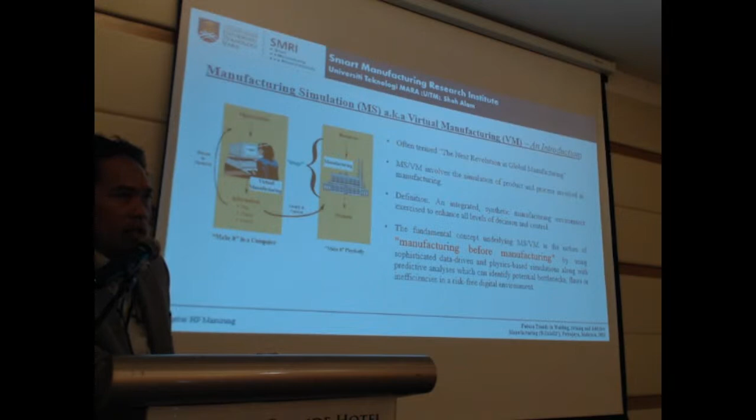So manufacturing simulations - if you go to Europe, Switzerland, or German-speaking countries, sometimes they refer to this as virtual manufacturing. There are a lot of definitions on that. Since many years, this term is seen as the next revolution in global manufacturing, and there are many definitions of virtual manufacturing or manufacturing simulations. I don't want to go through them part by part, but the most important thing is that virtual manufacturing's fundamental concept is the notion of manufacturing before manufacturing, using physics-based and data-driven approaches from experiments and so on.

Some things we have to know before we go deeper into manufacturing simulations: simulations will never replace the experiment, but they can minimize the number of experiments, hence reducing the cost. Simulation results are never 100% correct, because the input data is approximated, the mathematical and geometrical model is idealized, and the accuracy is also limited by the computer. We had a problem last week where some software couldn't be installed or run on a certain computer, meaning it also depends on the computer.

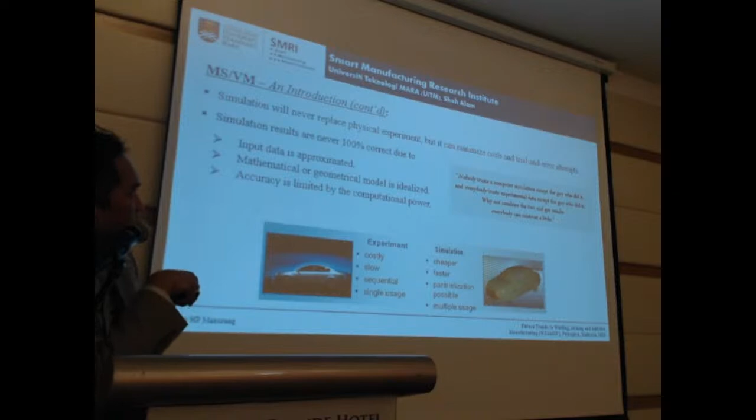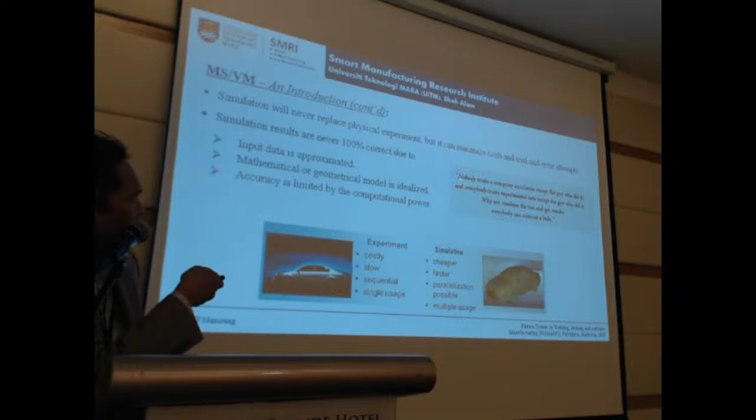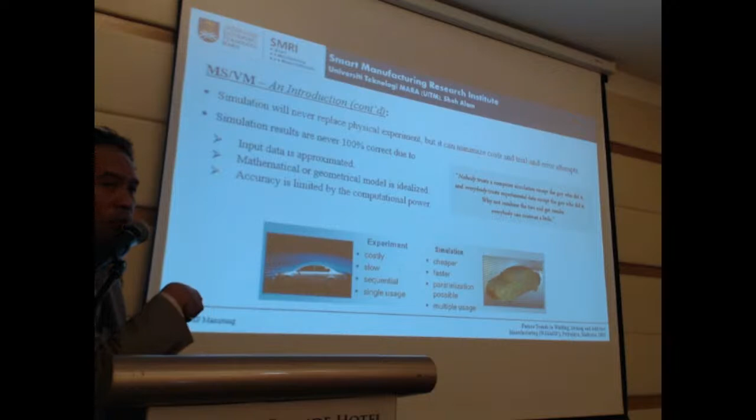We can compare these and see why simulations can give some advantages. For example, they are cheaper, faster, parallelization is possible, and there's also multiple uses. If you compare with experiments, those are costly, slow, sequential, and sometimes can only be used once.

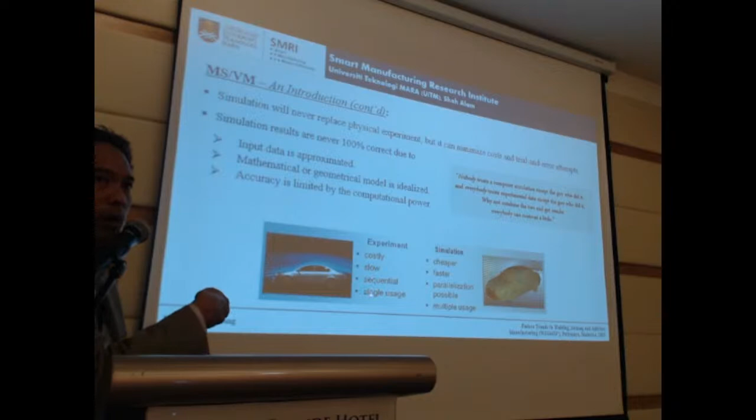So the challenge is that there are conflicting objectives in manufacturing simulations. We would like to have fast calculation, and we would like to have process chains - for example, if you do a coupling process, you would also like to do coupled simulations for that. We would like to have real physics, so that it represents all the experimental activities or cases, and we would also like to have simplifications. So this is like the conflicting objective when using manufacturing simulations.

So how do we resolve this? We need interdisciplinary sciences, maybe between members within the groups - not always other faculties. So the members in the group can specialize in various interdisciplinary sciences.

The application of simulations is often only for a single process, but the direction is toward chain processes. Currently, how can we simulate the process after one process? For example, if you are doing forming and welding, or warm forming, you need simulations that couple the processes - meaning all the data from the previous process has to be transferred. It cannot be just a single process.

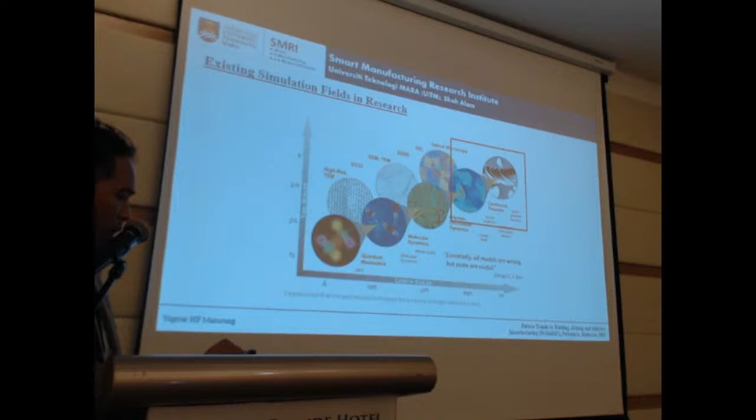With regard to manufacturing, we can divide into two: applied and fundamental. If you see here, the continuum finite element, we can have some methods here, for example thermal, mechanical, thermomechanical. This is considered as the applied.

Applied research, and here is for the fundamental. So we are doing this kind of discrete dislocation dynamics, by having crystal plasticity finite element and also cellular automata, phase field. This one is more to the fundamental.

In between applied and fundamental, we can do this kind of thermomechanical metallurgical and also thermomechanical fluid. There's combinations between CFD and also continuum mechanics, solid mechanics.

So here the objective, what we can do, for example, only the temperature, distortions, and so on and so forth, up to the grain structure and texture.

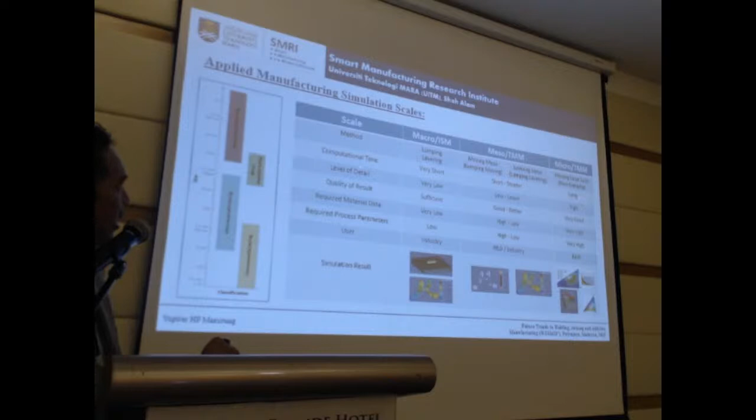If you see also here, the computational time is very short, and the industry would love to have this kind of simulation method. And here, a little bit short. And here is very long. Level of detail also, you can see, very low, low, and high. And the quality of result: sufficient, good, and very good.

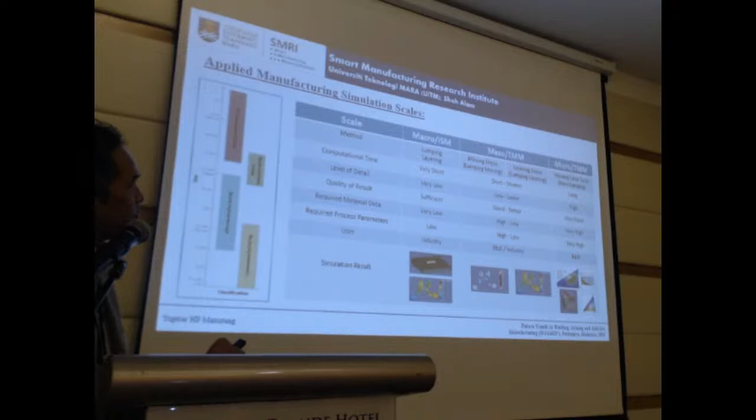If you see here, lumping is one of the methods which we are also investigating until now. What is that actually? So if you see here, we differentiate between non-lumping. This one is very slow, right? It means that if you have big components and you have to do that kind of simulation, it will take a lot of time.

So what we can do is actually lumping here. Lumping meaning that in lumping moving, some elements are combined together, so that it is a little bit faster than this non-lumping one. And then here is lumping layering. Some software is using this lumping layering, for example SLM, so it will use the equivalent heat source equations here. So it means layer by layer, the whole layer will be simulated, will be lumped, we call it.

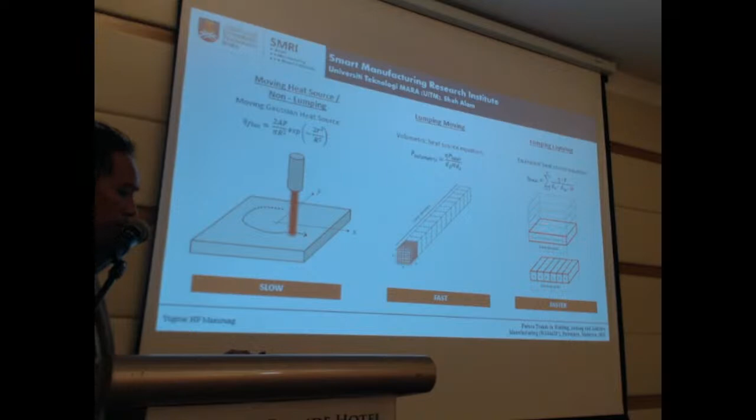So challenges in the macro and in the meso. For macro, or inherent strain method, the Japanese professors or researchers would love to do the ISM a lot. I saw a lot of journals, they are using the macro. But in macro, you need equations which you trust that it is correct, or you need the calibrations for that.

So for the meso, or TMM, thermomechanical method, you need also to know that the temperature is correct, so that you have to do the calibrations for the temperature. So both, you have to consider.

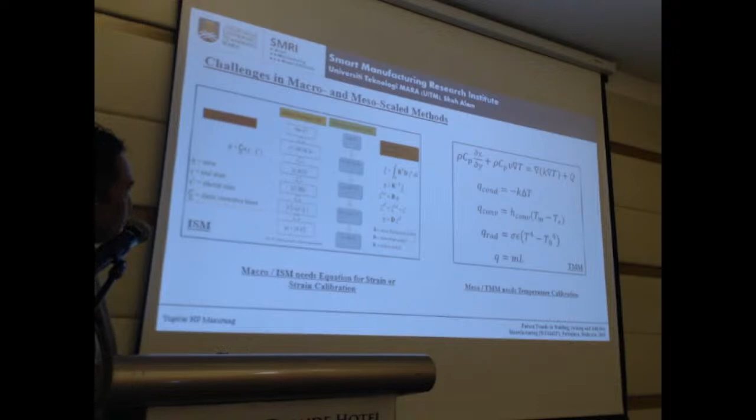This is also something new in the simulations world, especially for manufacturing. A lot of forming processes are coupling with this, meaning meso and micro scale, also with defects, for example to find damage, strain, stress, and so on.

All right, I'll go faster here. Some case study: at Volkswagen, this one is from 2019. This is Mr. Ralf Sundermeyer, director of CAE. What he said is about 2025, that one was 2019, short before COVID, so I think that will be extended.

So by 2025, he said that at Wolfsburg, Volkswagen, each engineer shall be a CAE expert. You can imagine the employees maybe 40,000, engineers maybe 2,000 to 5,000. On any computer they have to have this CAE. This is their dream, that every engineer must be capable of doing this kind of CAE.

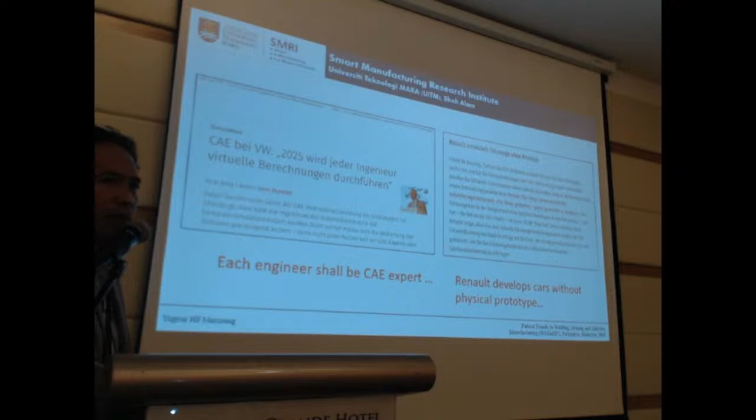Also, Renault, for the Clio, a small car, developed the car without a physical prototype. So they trust the simulations, or the trust of the simulation is there, without any physical prototype, only the simulation.

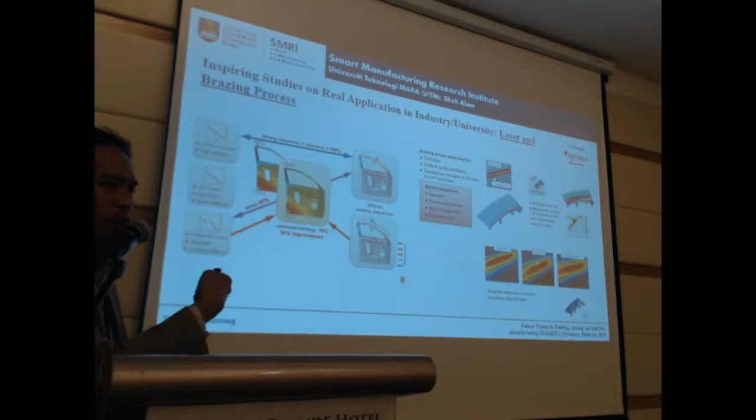Here at Audi, I'm also dreaming until now that I can get a call from Proton or Perodua, saying 'Peter, can you do that kind of investigation on the welding sequence, for example?' So this is for Audi. What they are doing is defining which welding sequence is appropriate for the door. Normally they do 80 experiments, but with the help of simulations, they do only 5 experiments, trying different sequences to find the best sequence for laser welding of the door.

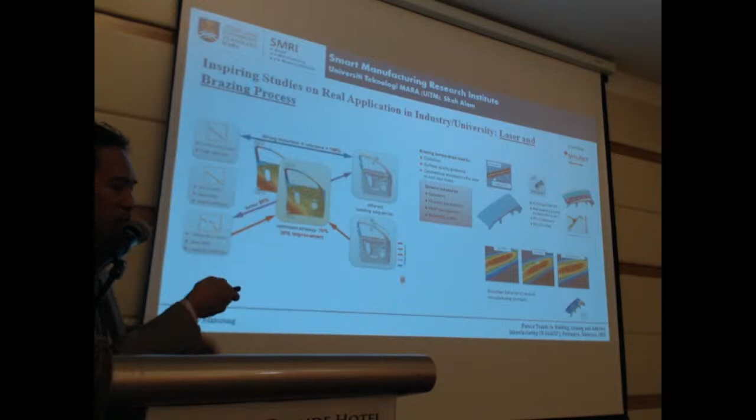This is for laser brazing, also I think by Volkswagen. They simulate without holes, with holes, and the holes after the brazing, meaning brazing first and then the holes. Then they would like to see the distortion. So that kind of project is quite interesting, also done by automotive industry in Germany.

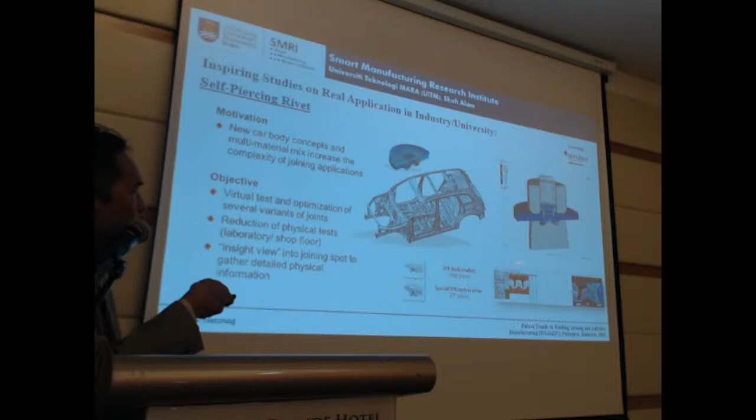They are investigating the self-piercing rivet, also using simulations. You see here, the normal SPR needs 2085 pieces. With this new idea, they reduce it to only 277 pieces. So you see the impact of that kind of research.

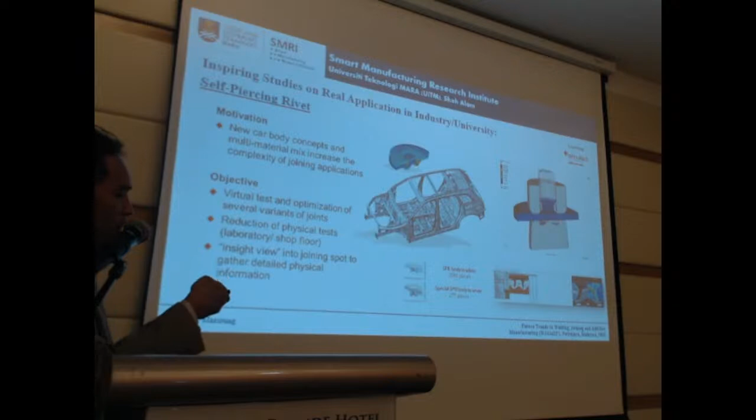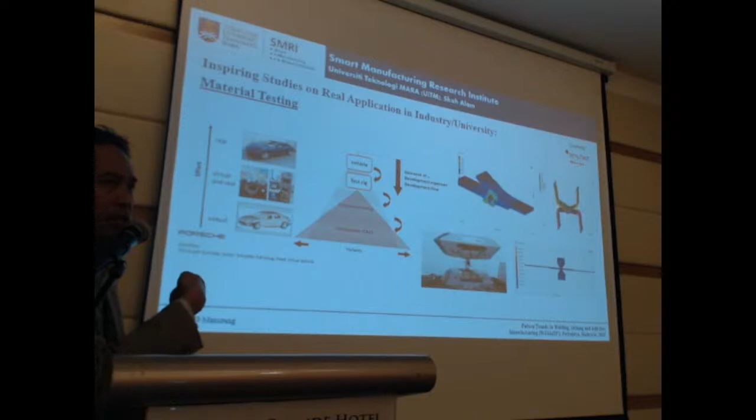Testing at Porsche, yeah, they are using simulations for material testing. What they said is that you see here the decrease of development expenses and also development time. So they are also moving towards virtual testing.

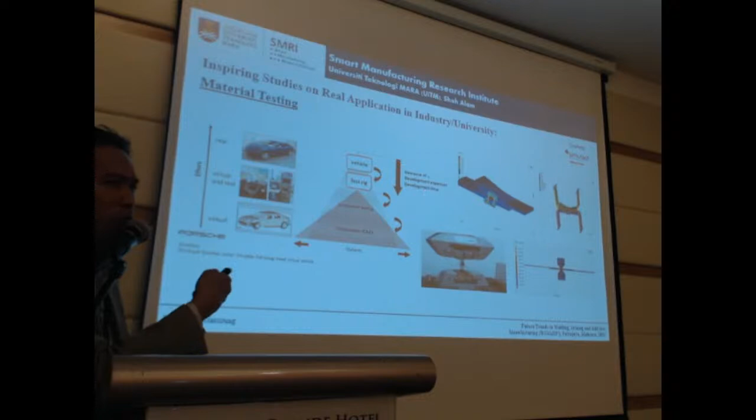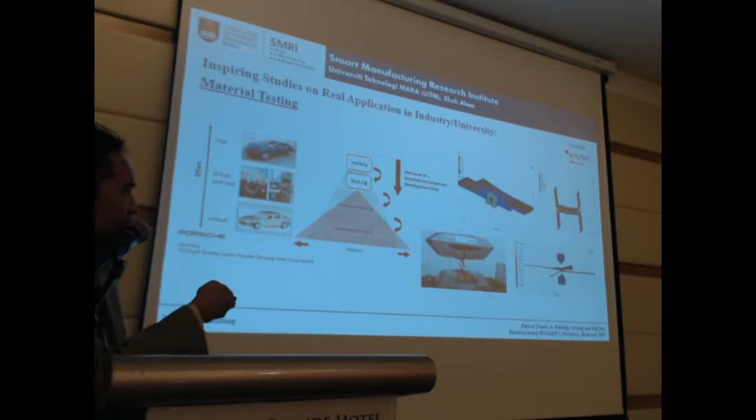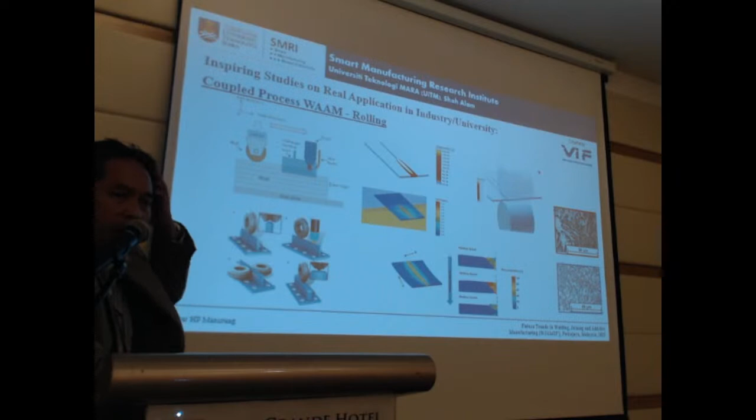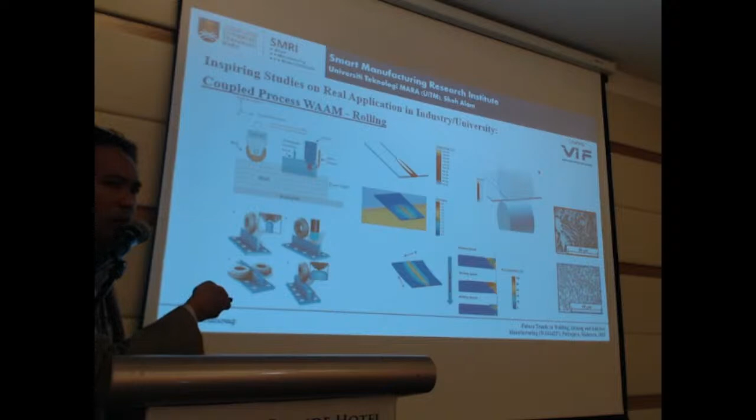But what is interesting here, this one is with our partners also from a German university. They would like to weld and then roll. By using these simulations, they can define after how many seconds they have to roll the plate after welding, so that they have full recrystallization. They found out it's about 4 or 5 seconds after welding that they have to start rolling. So that kind of thing they can simulate.

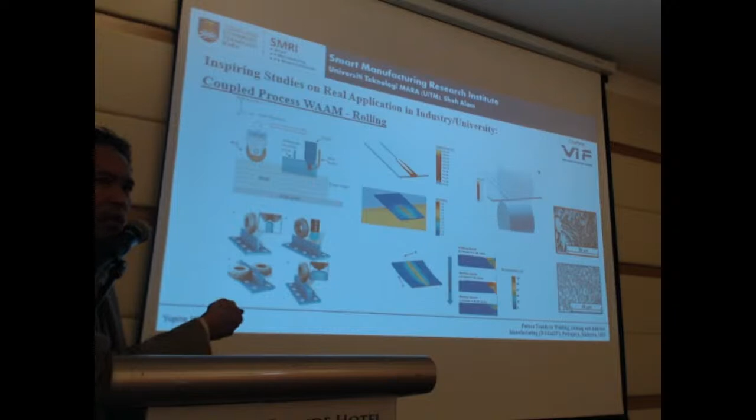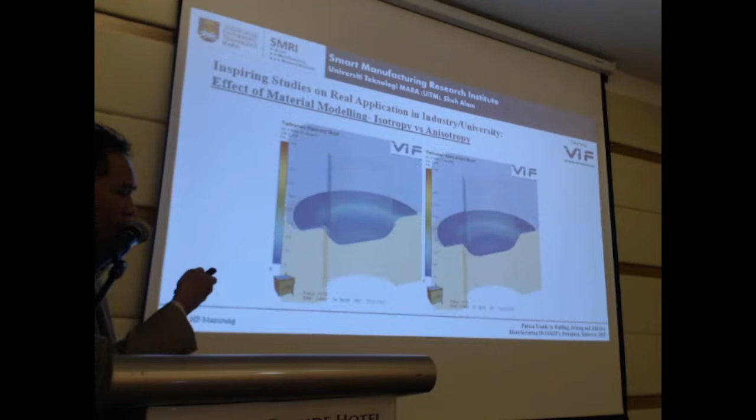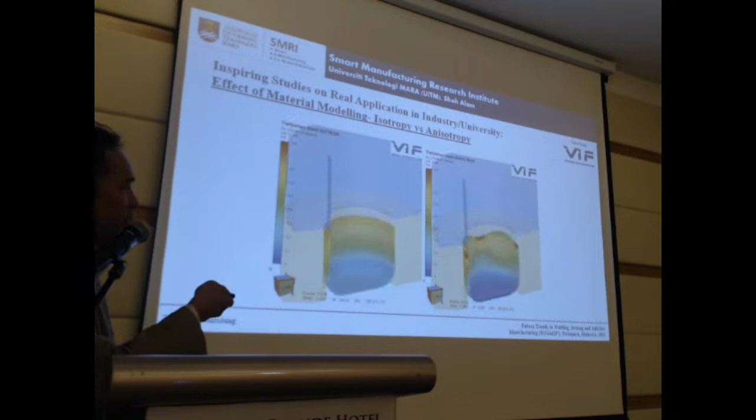This is also interesting testing. Last time if we do the finite element method, we always assume isotropy, we never consider the anisotropy. You see here the difference between this - it's different.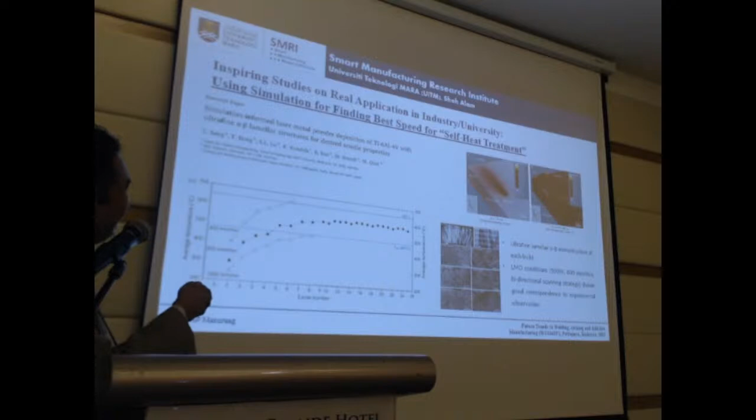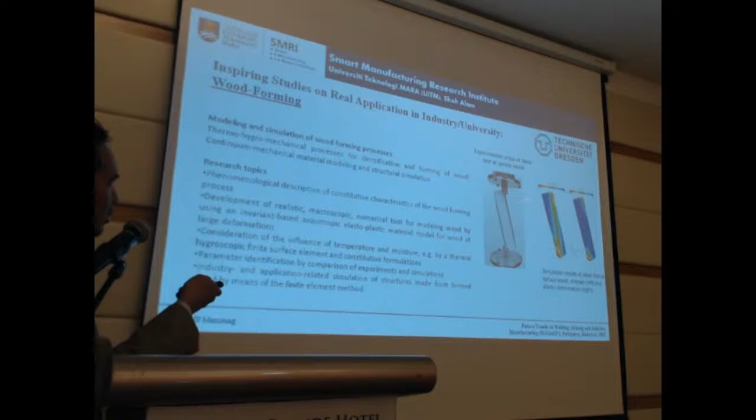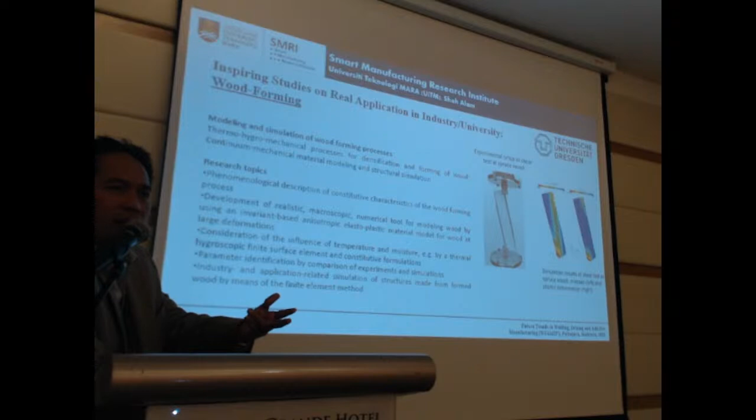This one is interesting, wood. This one is from Dresden University. Wood is very interesting because from tree to tree, it's different. It's not like steel, where properties are maybe similar from batch to batch. Here, from tree to tree, properties are different, meaning you have to investigate the material properties for every tree.

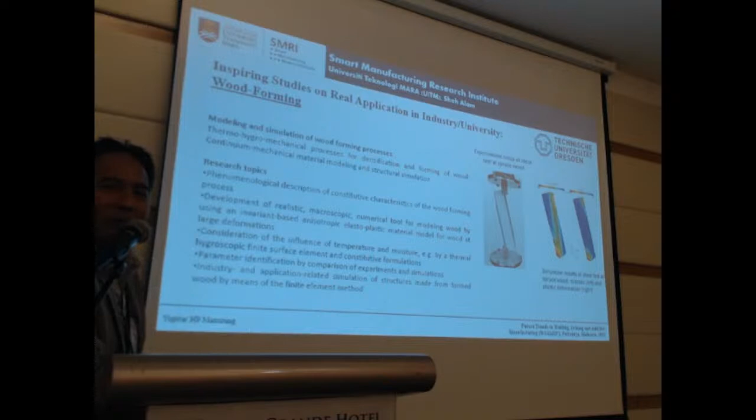So this one is in terms of generative design, or topology optimization. This one is the logo for Airbus, and Honda. This one is BMW. They're doing that kind of topology optimization or generative design.

Here, this is also by artist Philippe Starck, the first commercial chair designed using generative design. I hope some of my students, who have a bit of artistic sense, though mechanical engineering makes it a bit harder, can do that kind of thing - check and see the stress distributions and so on.

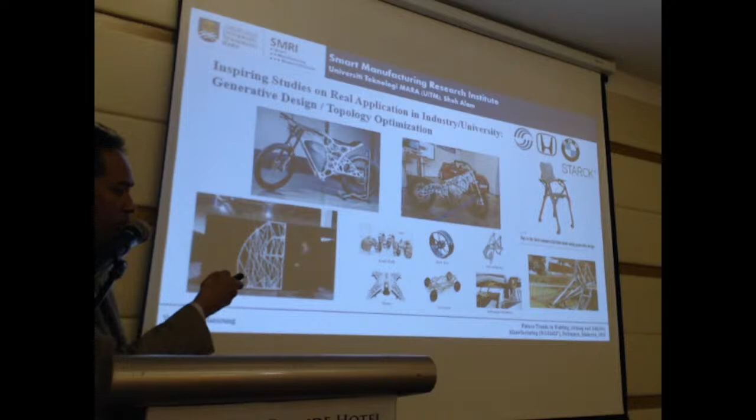Alright, I don't have much time - 5 minutes okay? So that one is from the sideline. Now there are several selected case studies that we have done at our institute. First, let's talk about our facilities.

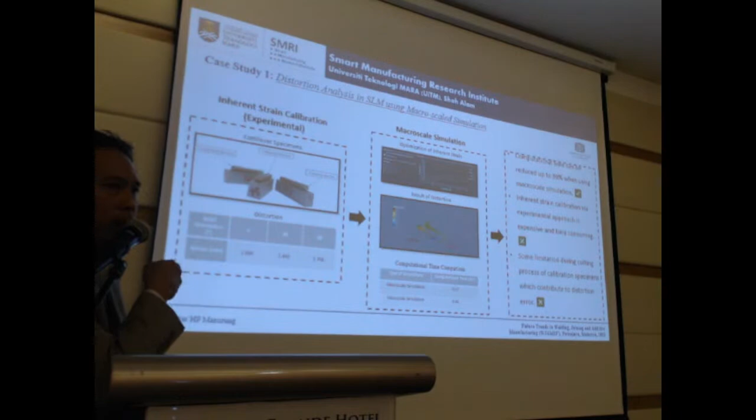Why? Because for these calibrations, after you print, you have to cut - you have to print the cantilever like this, cut the base plate first, and then cut here also to see the deformation. That's just for calibration, not the distortions of the actual part - just to define the strain and put it into the macro scale FEM. The strain used is very important.

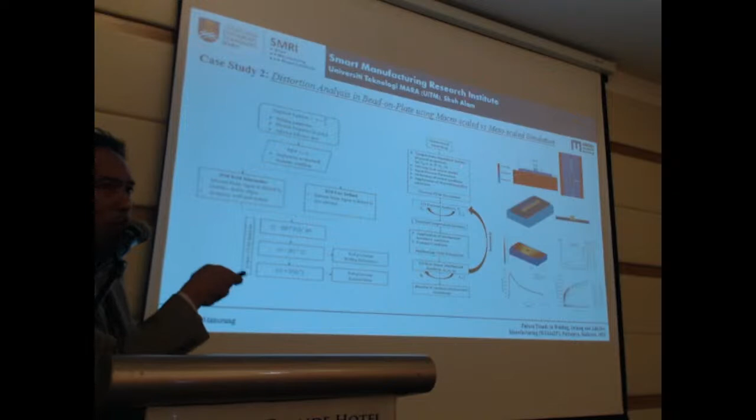And then we move to this one - bead on plate, bead on plate. Using macro scale with meso scale, FEM with TMM - these two, FEM and TMM. We did this using robotic welding and so on. So we found out here.

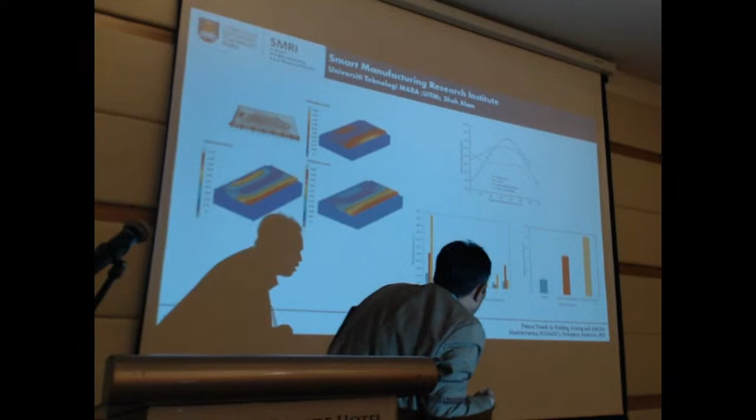You see here, this is the computational time, and here the error. Error - the TMM error is shown here at mesoscale, and this one is FEM. FEM has two types, user defined and also weld kinematics. So you see its error, and here is its accuracy. Experiment is here. TMM is of course always the best, you can see here.

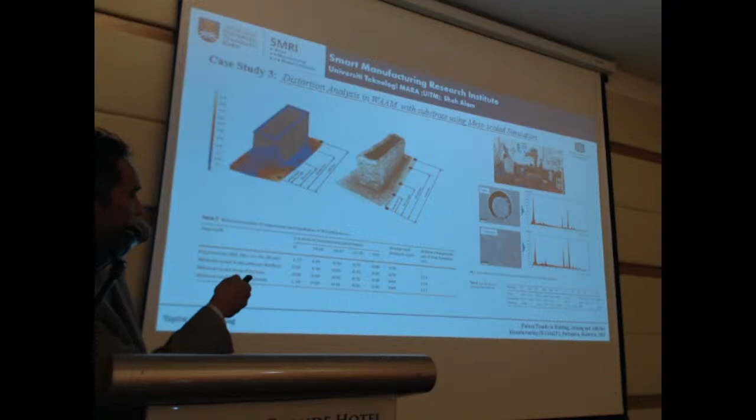All right, so we are using also meso scale for this bracket. You can see also here the error, 1 point something percent. So it means that TMM is indeed okay.

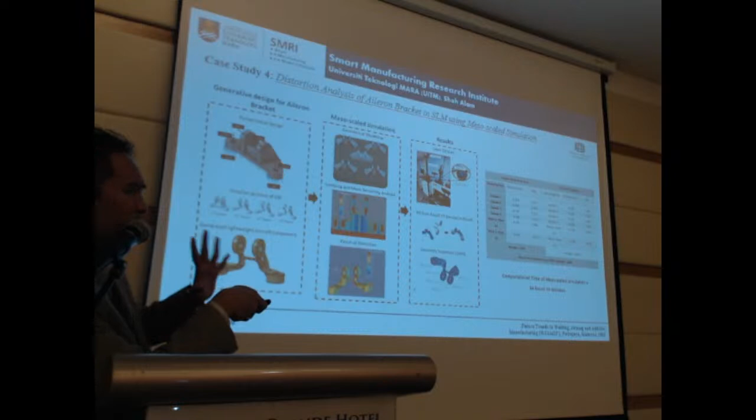So after we know that TMM is okay, then we would like to replace the calibrations that were very tedious before, that required cutting and so on. We do the calibrations by using the TMM.

We call it the virtual calibration test by using the TMM. So here we do multi-scale, macro and meso.

That one is from Cambridge. So we see also the percentage error. It is around 8%, something like that, with the virtual calibration test.

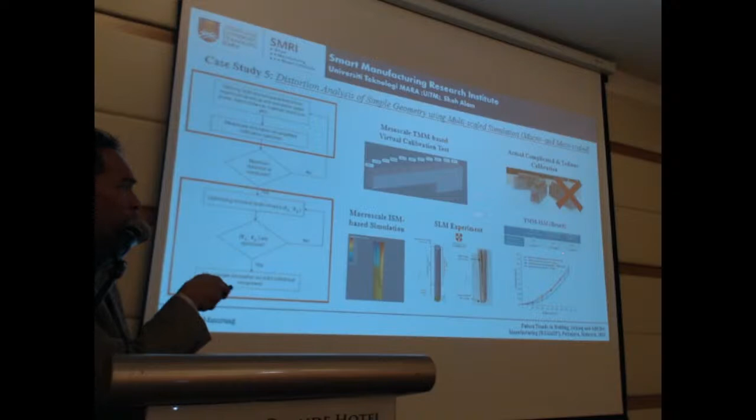And then we test into the component like this, also by using the virtual calibration test. So we have around 5% error, something like that.

But you can compare here the computational time - for the meso scale only, it's 14 hours. Here, by using the macro and meso, it's only 5 hours.

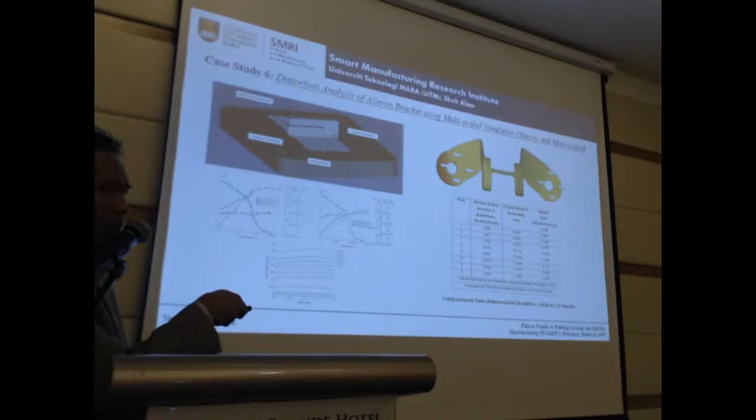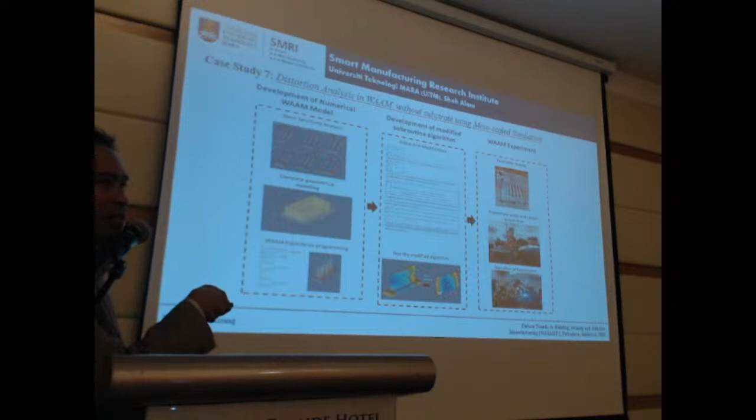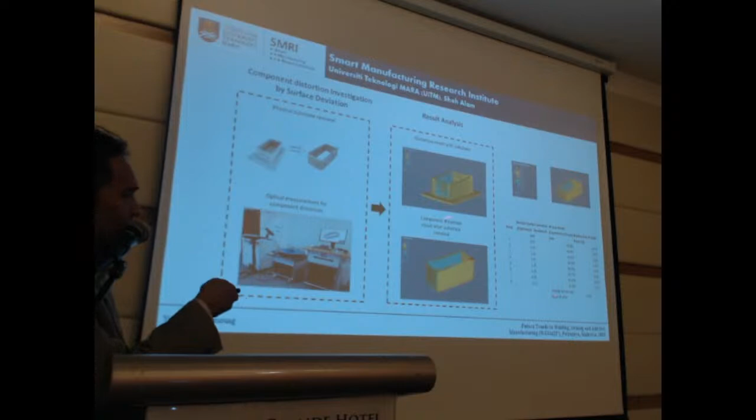And this one is also around 3% for the TMM, for this kind of research.

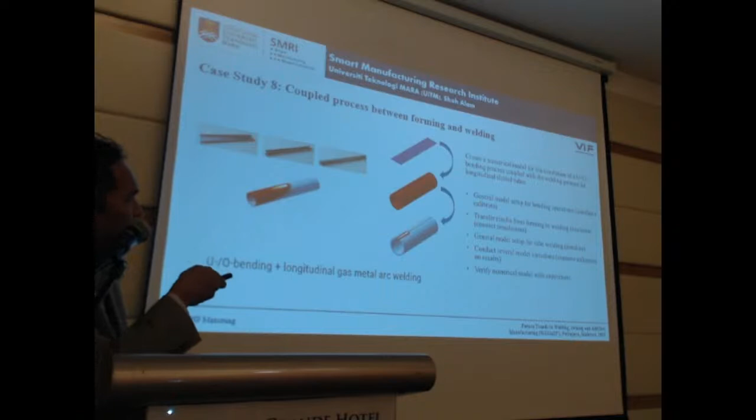We have done also couple process, forming and welding. This is also very interesting. And this is actually given by our partner from Cambridge University. We do this one.

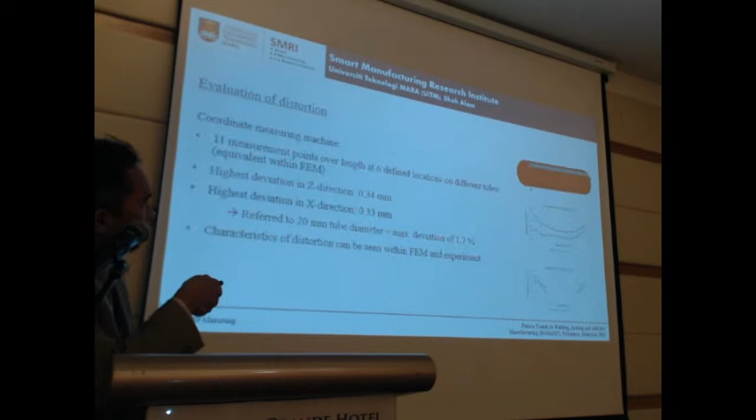So we do forming first, then welding. This is without transferring the forming history from the previous process. If you transfer all of the geometry and the material to the next process, here welding, you see here the difference.

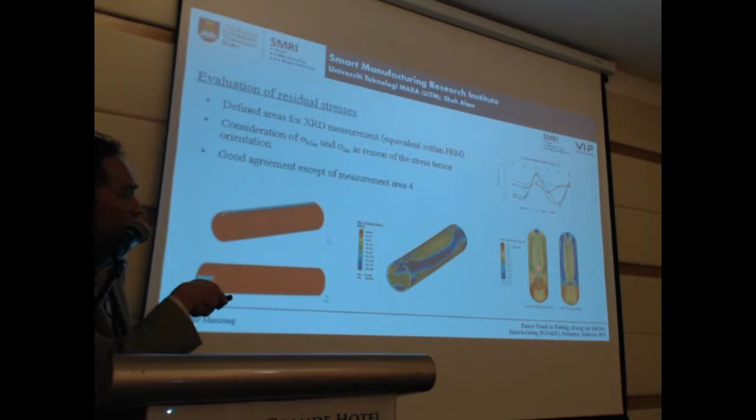So you can get better results if you take the data from the previous process.

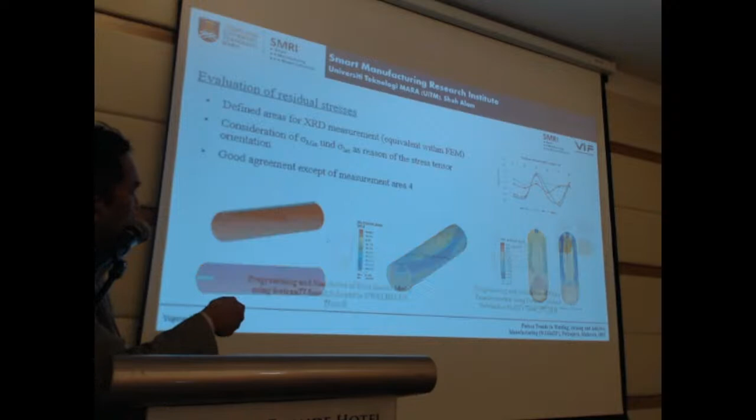Okay, let's go faster. So this one we also do for the phase transformations.

Also using subroutine - we open the software, write the coding. So that's interesting, because we manage to do this simple subroutine with the model of Seyffarth-Kasatkin, also from Rostock, I think, a professor from Germany.

Very simple one, just to check the Martensite predictions, how much percent we compare to the CCT diagram.

So we see here the error we get is around 10%, 15%. It's quite good. So this one is for the steel, low carbon steel.

So next we try to do for titanium as well. It's also very interesting. For those who are going to do phase transformation predictions here, please contact us - we can do it together.

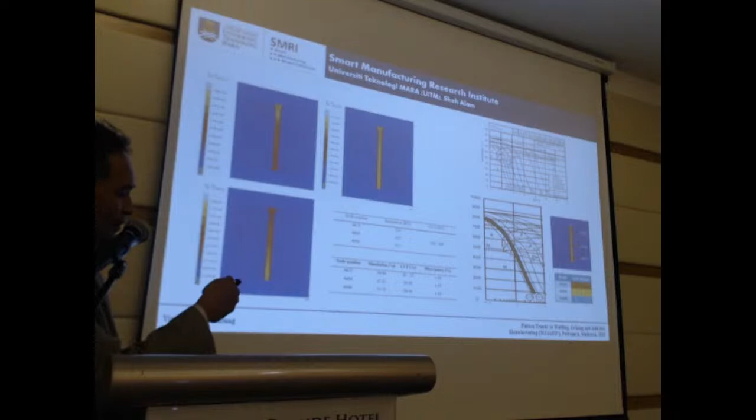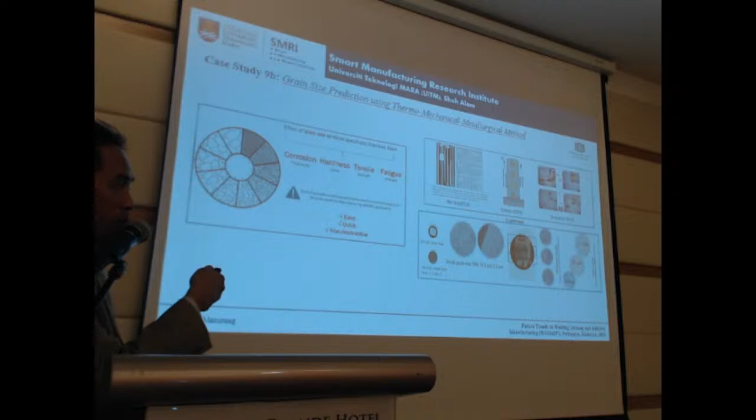Grain size, we have done also, for the predictions of the grain size after welding. We did this with our German counterpart, because we don't have the dilatometer here. We did it in Germany.

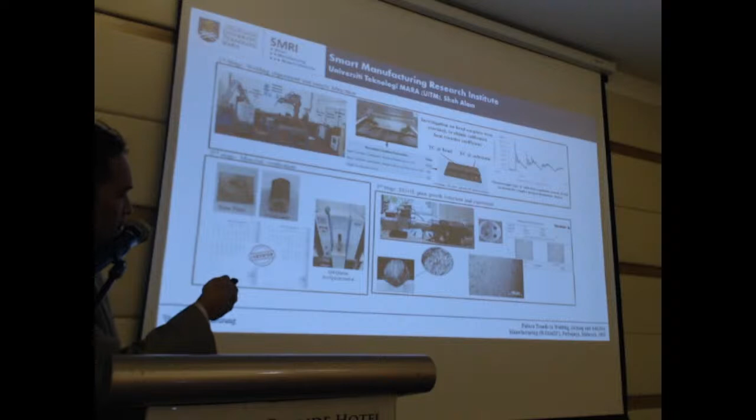There are a lot of grain growth models, but we chose this one because it's quite simple, an Arrhenius equation with exponential terms. This one is without precipitations, this one is with precipitations. It was very very good actually.

So if you write the coding, you can also see the grain growth evolutions later on. What we choose is actually this one, because we know in welding it's very fast, so there are no precipitations.

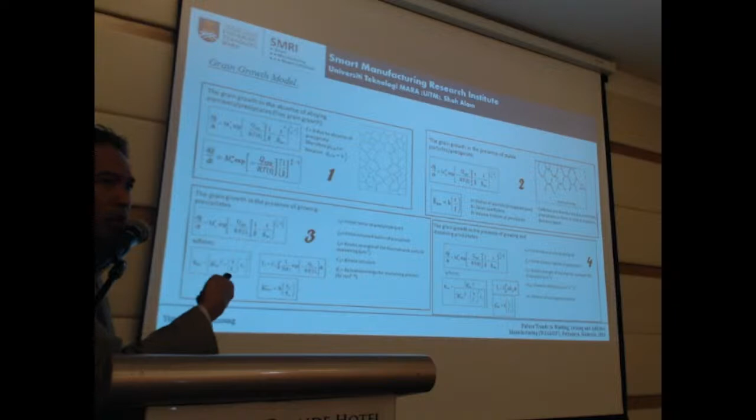Thanks God, so there's something we remove from the equations, so that one will be very simple, and then we put it in the algorithm coding and so on and so forth.

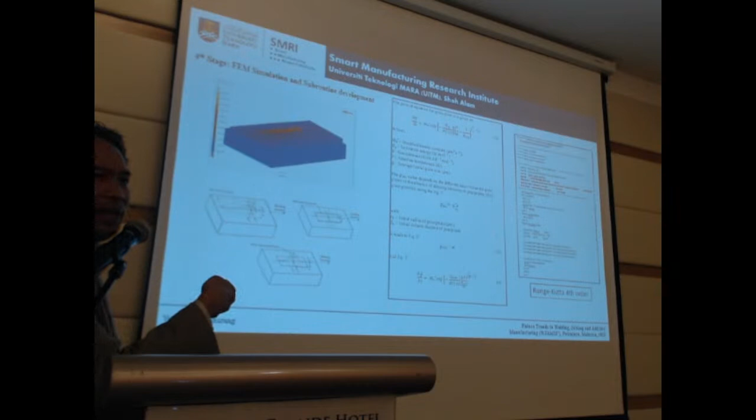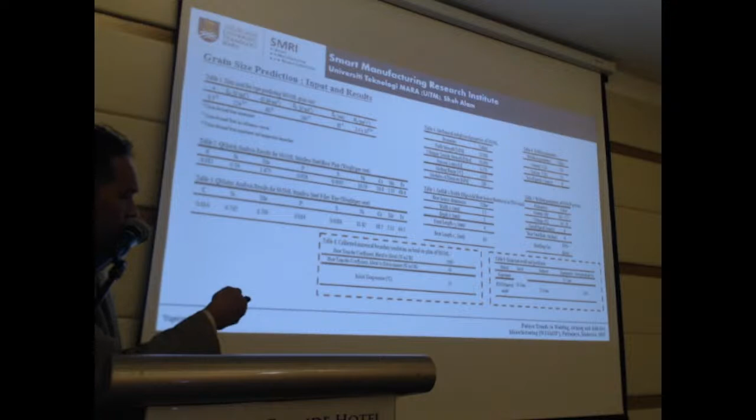For cutting we have done this too, and here it's also very interesting. If you do the FEM today and run it again tomorrow, it will give you the same result. But if you do the experiment today and do it again tomorrow, the results are different. Why is that? Because there is probability involved.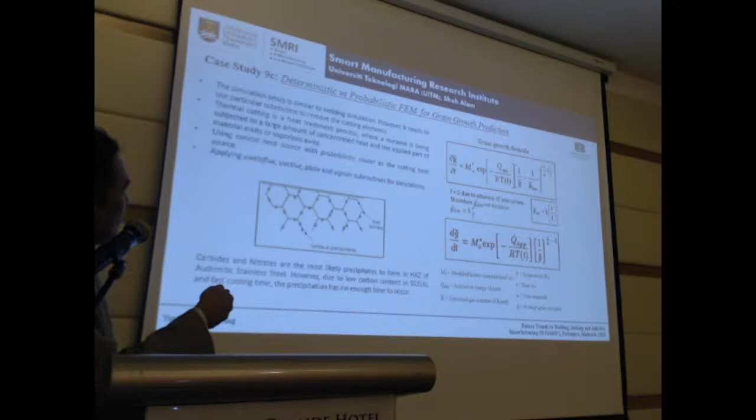So we need to put the probability factor into the FEM. We call it the probabilistic FEM. What we do here is continue the research on grain growth, using the first equation, without precipitation, and then we apply Monte Carlo here.

We put the Monte Carlo on the power, because in welding the current fluctuates while the voltage is relatively constant. In cutting it's different: the voltage fluctuates while the current is relatively constant, but this affects the power, so the power is fluctuating. One of the factors that can change the process is actually the power.

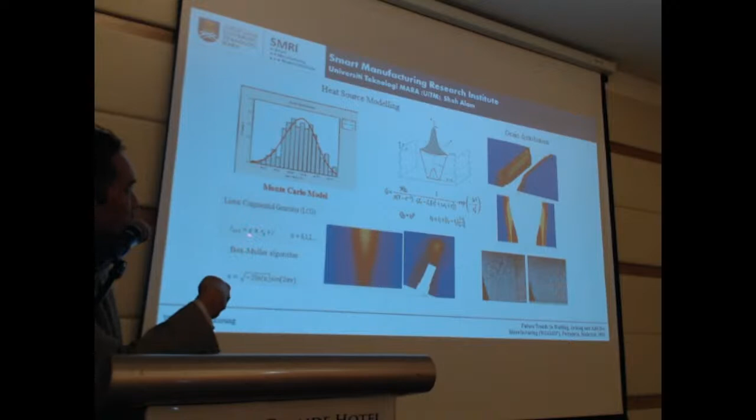So here is the Monte Carlo method, very simple actually. We put it into the coding and then see the result. If you use probabilistic simulations, the error can still be big, but somehow it's better than deterministic.

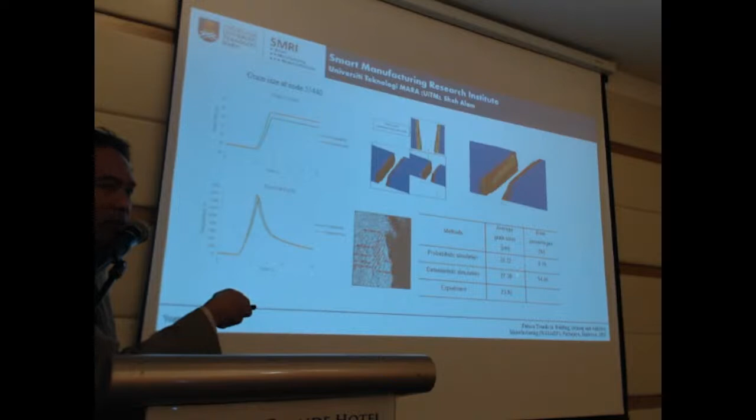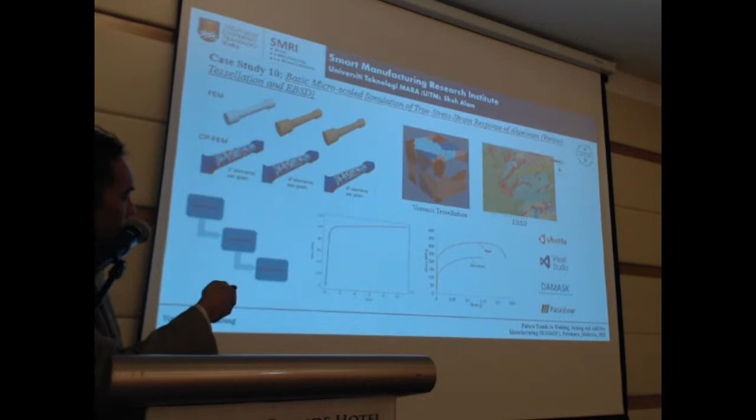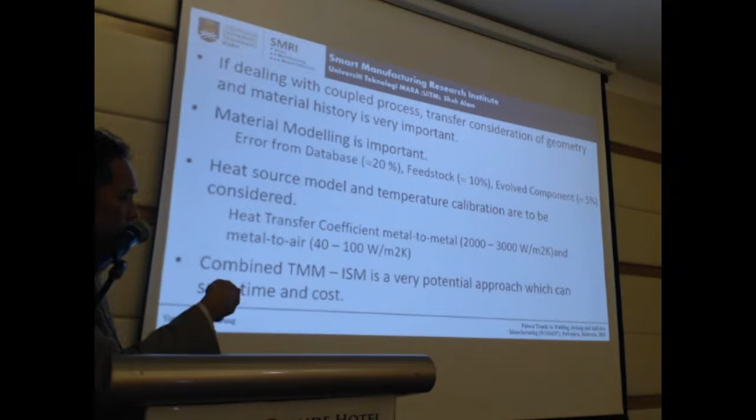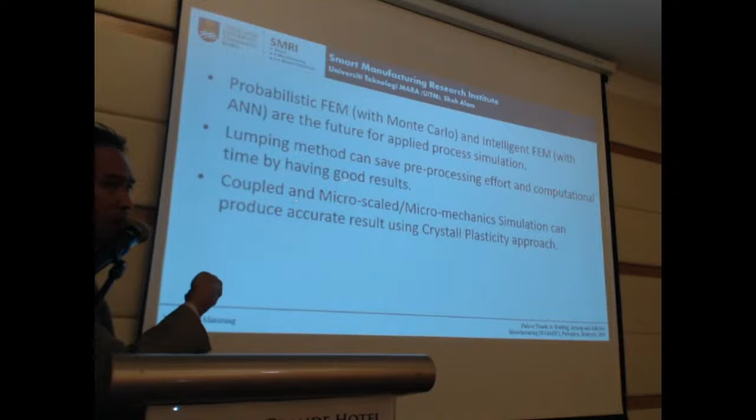Combinations of multi-scale modeling, TMM-ISM, macro-meso or meso-micro, is becoming a trend. For probabilistic FEM, the lumping method can save pre-processing and computational time, and then coupling this with meso, micro, and so on is also becoming a trend.

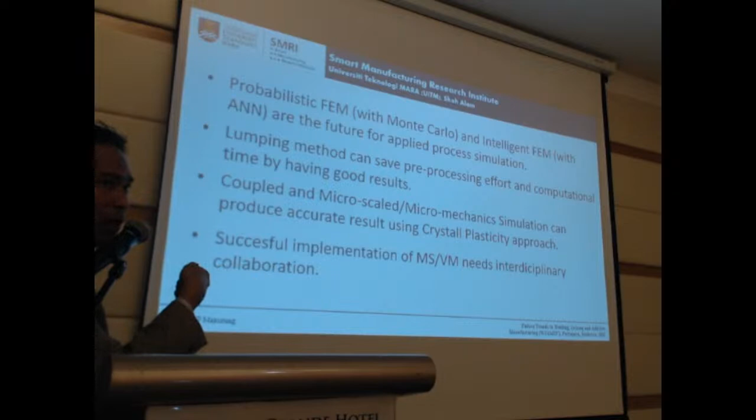Successful research needs collaborations. That's why we need collaborations, because we don't have all of the equipment we need.

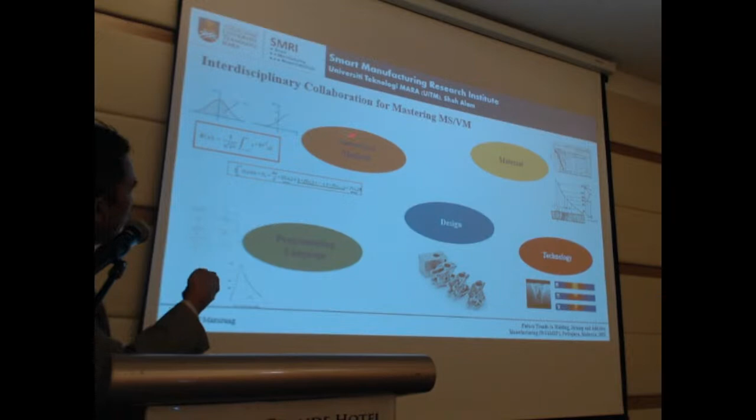So for academicians, lecturers and so on, this factor of numerical method, material, technology parameters, design, and coding is important. So if you would like to find good postgraduate students who want to do things like this, they need to know coding too.

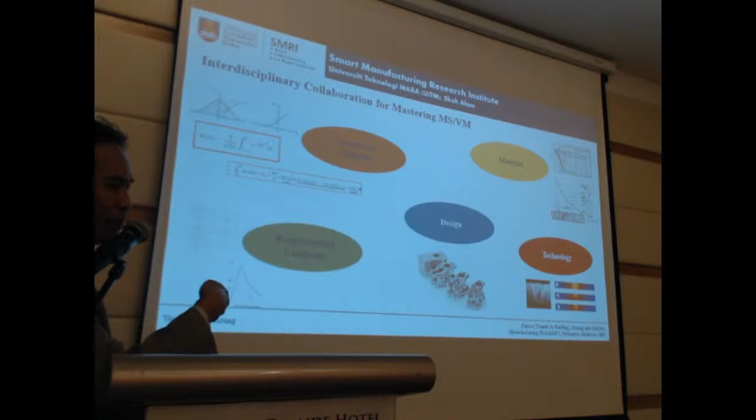So for our research, Fluid GD is a combination between TMN and CFD. This one is the cage valve. We did this using FDM, trying to look at it. The objective is minimum pressure drop and target volume.

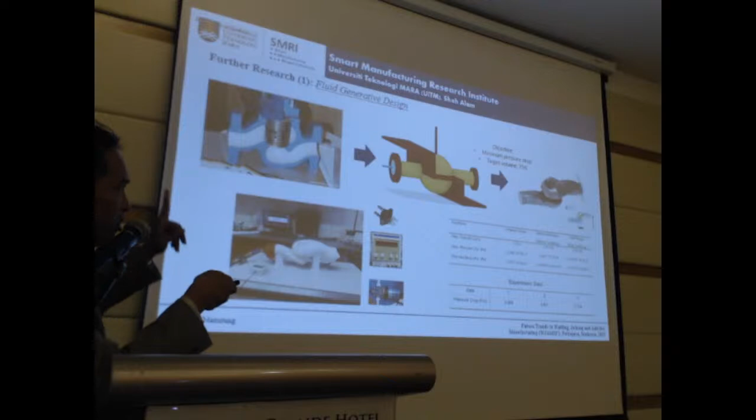This is new - an ultra lightweight component with lattice structure, using GD plus lattice plus high strength material, titanium 64. We would like to do simulations on the tensile test or pull test here.

From Queensland, they found that gyroid is the best lattice structure. We tried to simulate this too, but we're still far from matching it. Somehow our result is okay, but the trend still needs to be improved.

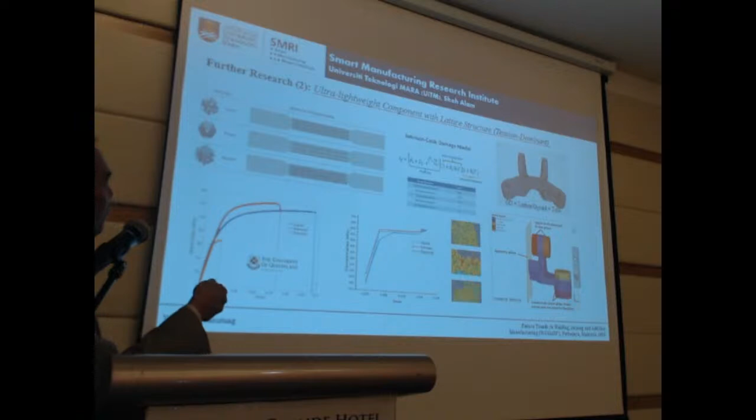This is crystal plasticity - meso and micro combined together. This is used to investigate the number of cycles to initiate a short crack.

If you see here, this is the experiment - this is the cycle to initiate, using the Tanaka-Mura model, also called TMM. Don't get it wrong, TMM here refers to Tanaka-Mura, to see the number of cycles.

This one is by using micropillar. We did this in Slovakia, not in Germany. In Slovakia they have this micropillar setup, which they call micropillar - compressed to find the CRSS, critical resolved shear stress.

So 134.5 MPa - this is for P91. You see here, yield is 550, and 690 is UTS, you see here.

This is our cracking criteria - the shear stress must be 2 times the CRSS. So the CRSS is obtained from this one, the micropillar test.

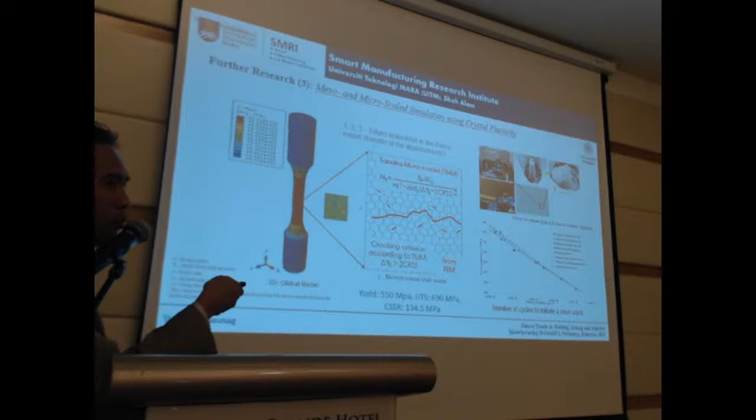This is the last slide - a general method. We have tried to develop this method for MAM. We call it the 11 steps for high quality product of MAM, starting from the design, with the inclusion of simulations.

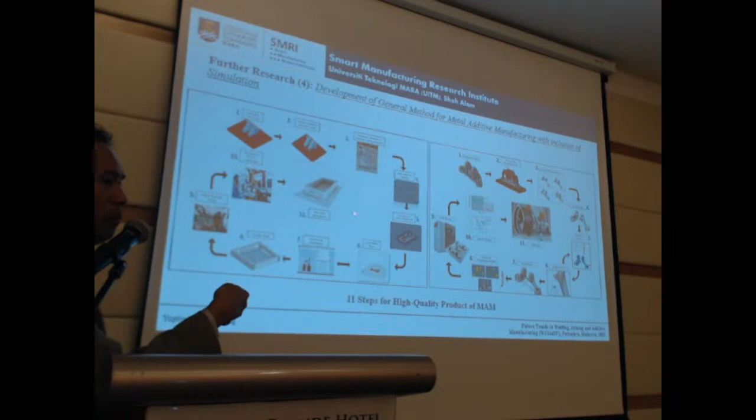So here is the simulation part, done here, and also here for the SLM. Our task is actually to combine these two together, so that we can get simplified methods for metal additive manufacturing. I think with this, I end my presentation. Thank you very much.